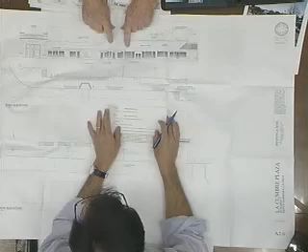We are going to be having hanging signs. I've got a detail of that if you'd like to see it. And then we addressed the rear of the building as well, which you see down below. I have pictures, which I'd like to show you, of the rear of the building.

That shows the coverage of the existing podocarpus trees that are in place. So what we're proposing is a fairly simple fix in case these die and are removed. Basically, we're going to extend a plaster wall and infill in between with cedar lattice as a screen, which brings it up to the same screening we have on the opposite side. We'd be plastering these pilasters all the way down, but leaving the slump block in between as it is, and perhaps planting vines down at the base of that.

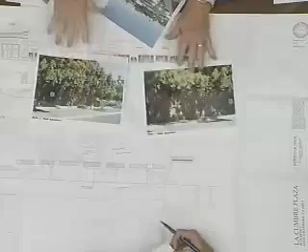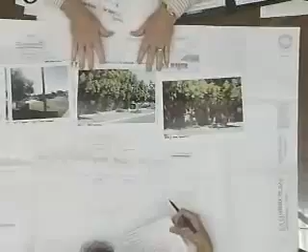Given the fact that this is screened the way it seems to be, this is a view from State Street at the backside. This is what you see from State Street, and it's pretty densely planted. We think that's a reasonable approach to the screening, and it effectively comes up to the top of the mechanical equipment beyond that.

So that's our suggestion for the rear elevation. We've made the adjustments in the front. We've also added planting areas in various locations, allowing for people to pass through and also allowing for more seating areas in places. We've added five in-grade planters in addition to whatever potted plants we put in there.

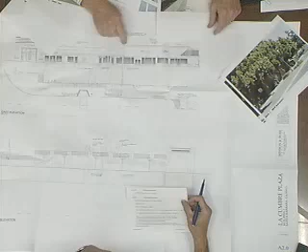Another issue was the extension of the parapet and how far that returns. Previously we showed an 8-foot return on that. We've increased that to 16 feet, and that shows up in the perspectives I'm about to show you.

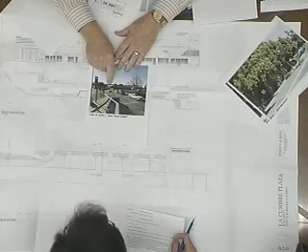The view from State Street of this building is this view right here, and this is taken from the top of a Google Earth truck, so it's about 10 feet high. You can see how much lower your point of view really is from a car. So the parapet beyond this is really not visible from that location.

I think as you get closer, you can see that that is the case, because the differential here is so little—there's just a couple foot differential. Then this is back from the edge of this, so you really won't see that at all.

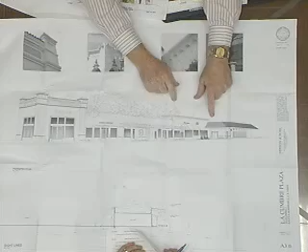Another comment that we're responding to—I'll skip to the next page, which is the perspective view, which illustrates the change to the storefront here, our proposal for the signage. As we understand, that's a separate submittal, but we wanted to at least have a concept for it, so the wood hanging signs hang off the trellis itself. One of the comments we received last time was that the corbel looked perhaps Asian.

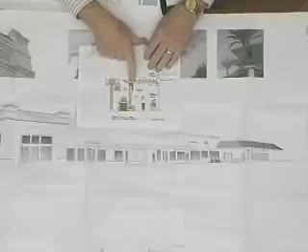We've adjusted that and revised how the lighting and the signage work in concert with it. We're still proposing wood posts and wood members. It looks similar to another project example that I have here. This is the lattice, by the way.

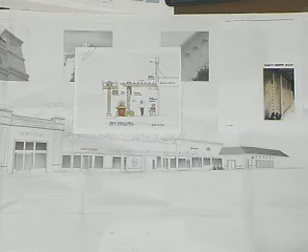We prepared these additional views as well in model form. The point with this: we are not asking for approval of this building. This is going to be separate and will be the responsibility of Panera Bread. But the rear elevation with the screening would look similar to that.

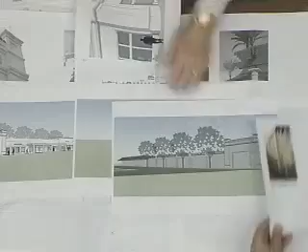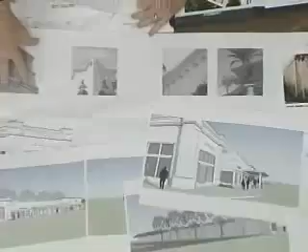Here's just a couple of other views from the model that we prepared. The components are not fully detailed, but we're looking at the cornice detailing following in spirit with what we did in this first building here. We are going to have extended corbels, as you see here with the first building, and then we're referencing this sort of form for these corbels down here. We don't intend to do it exactly that way, but that's the spirit of these designs.

And then finally, the example of the change we're proposing for the trellis is to revise the details, something like that, along with the signs changed as well—with wood posts rather than the precast that's shown there.

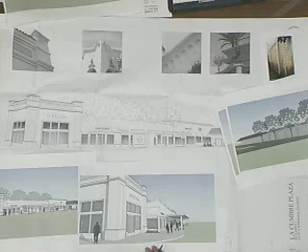Here's another picture of that particular building. We did another location, so I'm really referencing that piece of it there.

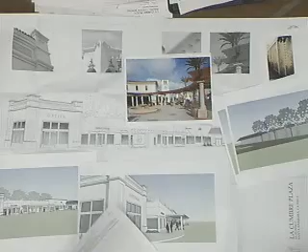In conclusion, I think we've responded to each of the comments we received, and given the fact that the back of the building is pretty well screened by the podocarpus, we've still acknowledged that it needs to stand alone, and I think we've got a reasonable response to that. We've demonstrated, with the perspective views and also the photographs, that you're not going to see the returns on the parapets other than what you see in the perspective here. This represents a 16-foot return. We will be refining the details with the next level, but in concept, I think it begins to work pretty well for us.

Do you have a roof plan, by the way? Yes, we do. It's in the set. Actually, that might be the piece we...

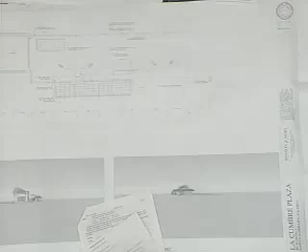We had been indicating that just as a dashed line above the plan previously, but I think you did ask for a roof plan, so... that's the return there. And these are actually the views in proportion of what you'd see from State Street, for instance, in that view, and this is in front of Vons.

Looks so little. With nothing around it. Yeah.

Okay, all right. With that, I'll see if there's... do we have any public comment? No? I'll bring that back to the board for questions then from the board.

Paul? Yeah, on the roof plan, is there, does that include?

Is this 16-foot wings that come back, is that on the north end as well? I'm not seeing that on a plan, on the roof plan. No, we're not returning it on the north end. And as I said, there's only a 2-foot differential. And if you can see from this view from State Street, if we returned it, you wouldn't see it anyway. So this is the view from State Street. In fact, that's an elevated view because cars are probably 6 feet below that point of view. And you can see what you do see.

Okay, that's my only question. That's it? No Keith? Dawn? Yeah, I had just a couple small ones. On the elevation, this elevation, what are these? This was the existing slumpstone wall. What are these lines and these little inset lines? And then what's that line there, that horizontal line?

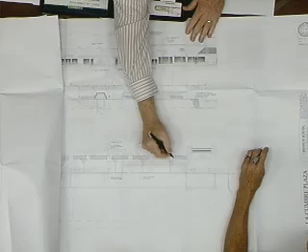See the other photo, it doesn't really represent a change in plane. This is set back from this. This plane will be in the same plane. You know, I don't know that we're going to need anything there, and it'll all be plastered, screed, so there won't be a real line. Not really. If anything, there might be something, because if we've got a frame wall above and it's attached to the block, it may crack at that point, so we may have a very thin screed or something like that, but nothing that's meant to be visible. So that's not really there.

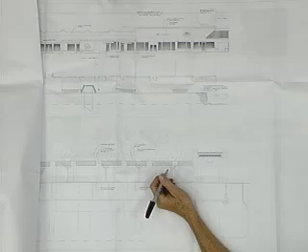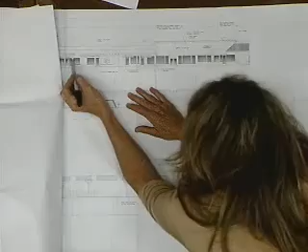And then my other question was, on the front elevation, on one of the renderings, you show the beams that come back to the building kind of sitting on a plaster trim, but here it looks like the trim is way below and not in line with any of the trellis members. So here you show the plaster, and then you show this kind of horizontal projection of trim. But then if you see that one rendering, it looks like it's making sense in terms of where the trellis dies into it, but not on the elevation drawing.

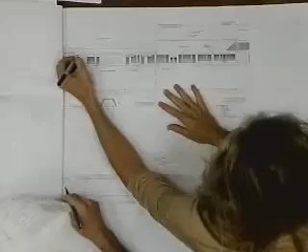The detail followed this drawing, and the detail is correct. It will be sitting on top of that piece of boarding. So this line right here is supposed to be the line of the top of the - exactly, but that doesn't follow any line of the trellis. Well, this line should sit right here, halfway down, in fact. So that line just needs to be drawn up a little higher, it needs to be moved up about 4 inches. Yeah, because these die into it. Yeah, that's what I thought. That's exactly right, no more questions. I think the detail is meant to clarify that. Okay, thanks. Paul?

Couple of quick questions. Are you aware of any construction that's happening on the back side of the building that we are proposing this trellis and such? I just turned it on, I'm sorry. I was there over the weekend on a totally unrelated thing, and this is the back side of the trellis.

Okay, I guess I'll show it to you first. There's a fire sprinkler pipe that's being installed, and I just want the board to be aware of that and how it impacts the construction of what you're proposing here.

Just so we're all on the same page, because we're doing a TI, the new fire code and building code require all buildings to be fire sprinklered. So that's what triggered this pipe being put across here. Because it was a TI, it didn't get design review, but now we're doing the front side, so we should address that. It's not to penalize you at this point, it's just to make the board aware, but other people can see the way that precision block was going up like he was talking about.

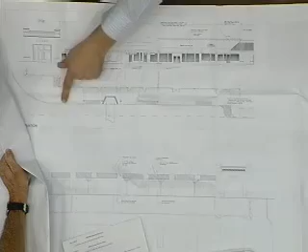There, the bus stop's right here. It's right before the corner, right before it starts curving around. It's right up in here. And that's where the bench is, right here. The bench is right here, and then the bus stop is right there, just where this cuts back.

Trey, did you want to comment on the sprinkler line? Well, you're exactly right, because of the TI, the fire department required the whole building to be sprinklered. That's the reason for that. Sorry about that.

Okay, Chris? Thank you, Mr. Chair. On the west elevation, you're showing vines on the exposed CMU walls. It looks to me, from the photo, like they are not existing, so you're proposing vines?

Actually, we need to clarify the ownership there. The property line is very close to the wall at that location. There is already planting there and already irrigation, but it may be on the neighbor's property, or we would like to add vines. I see, okay. I didn't see any planters or vine pockets called out on the plan, that's why I was asking. So if you do end up heading down that road, you might show the location of those planters.

The next question was the crosswalk. I assume it's shown at the location where it currently exists. That's correct. Okay, that's it for questions. Thanks.

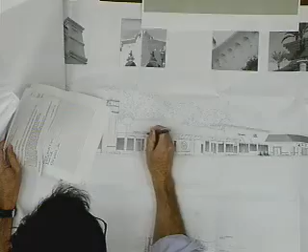Okay, all right. You had another, I think it was a 3D perspective of this corner here. So what we'll have here is a beam, or a plaster rib, that goes down like that, right? Exactly, the detail that you see here.

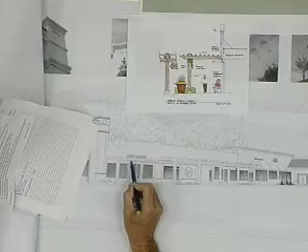And this connection here already exists, that connection. Yes. So the parts being added are these columns here outside, with this bulb out that comes above it, right? These will be added. No, those actually already exist, part of the storefront here. So the only thing added is this bump, this thing here, in that location.

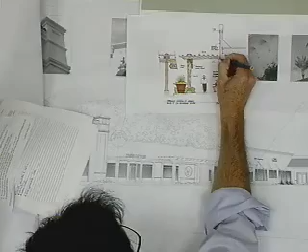Yes, and that divides along the existing storefront. It goes all the way along. That's the part that's being added, this part here. But this goes right down and turns like that, right? And returns like that. Right. Okay.

And then, I guess my last question is, what is to be done about the fire sprinkler line that's there now? Well, I wasn't really aware of it, so I've got to figure that one out. It's going to have to be... encased somehow, but they have to get to it as well, so that might be somewhat problematic, but we'll come up with a solution at the next level of detail.

Okay, because we'd like to know what's going to happen with that as part of this, looking at the whole back to front of these buildings. That's one of the items we need to look at, especially since that's probably a violation right now, to be able to do it without a permit on the outside of the building like that.

So, okay, that's it for questions. I bring this back to the board for comments. Paul? Thank you, Mr. Chair.

I like the addition of the in-grade planters, and how you've broken up the building, the two sections of the buildings, works a lot better for me. I would like to see some return on the north end. I might be the only one on this, but I still think you can see it. I still think it looks like a fake wall right in front. I don't think you have to go back 16 feet, but I still think there should be a return.

If you go back to the section right here, and if you look at your roof plan, the one I was looking at, these units are all the ones that run down the building, and this is the only one down here. Is that correct? That is correct, and there's actually a screen around that.

Yeah, so I don't see why you need it at all. If you can't see it, you don't have to screen it. If it's not seen from view, you don't have to screen it. So we request screens on equipment that's visible. If you can prove it's not visible, it doesn't require a screen. So you may find that you don't even need it, except for screening this unit, and then, in my opinion, you could do that with lattice, just if it's not already there.

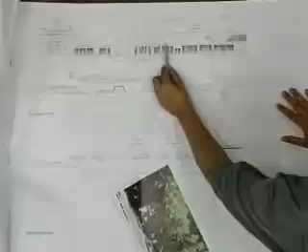Awning-wise, can we go to the main elevation? This is a minor point, but I'm just looking at the way these awnings are laid out, and it just looks a little funky. All I'll say is the awnings need to get addressed, but a solution would be to have just one awning over See's Candy that relates to the door, move the lettering over so that this reads as an elevation, and drop these two sides. Then over here, I'll let you be creative and come up with something, but right now the spacing of the awnings and the mullions and everything just looks a little bit awkward, and I'll leave it at that.

And then the last point is to make sure that all of the bus information is shown, because I see a lot of pedestrians there, and it just needs to be incorporated with your landscape plan. But other than that, I like the direction it's going.

Thanks, Paul. Chris? Thank you. I agree with Paul's comments. I think...

We were discussing the awning issue, and I think centering that over the doorway would really help, and maybe stretch it out a little bit too - it doesn't have to be so thin. As far as the lattice goes, I'm worried also about the longevity of the material, so for that, I won't go into it - I think my other colleagues here have commented enough on that one. I do appreciate the addition of the planters here, I think that's going to really help.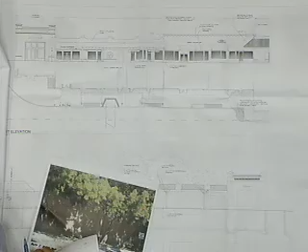It's such a stark area to begin with, so this is much appreciated. I'm looking at this—1, 2, 3, all the same size and equidistant. For some reason I want to stretch this one out a little bit and make it longer. I think it's a real safety issue. Instead of being able to walk out anywhere from any of these stores, you concentrate the flow into certain areas. But that's just a minor suggestion—throw that off a little bit and not make it so symmetrical. But that's all I have. Other than that, I think it looks good.

Okay, thanks, Chris.

I agree that this corner here needs to return, probably at least so that you can get maybe 2 of these things, because that shape on the end is going to be very odd to do if it's just the thickness of the wall continuing around the corner. If you flip this around the corner and the wall is only half of that arc, it just looks really odd. So you need to really turn this around so you can get at least 2 of these, or one full one that makes a corner. I would suggest that you get 2 of these before you end it. Something like that. Yeah, right.

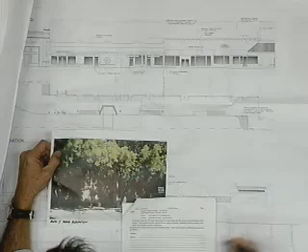The other thing is, it's unfortunate, but I think you have to address the fire sprinklers on the lattice work—I agree. I just do not think the wood is appropriate up there, and I would like to see a metal or some other material that would be more in keeping with the architectural integrity of the building. So I would be more for you changing the material of that.

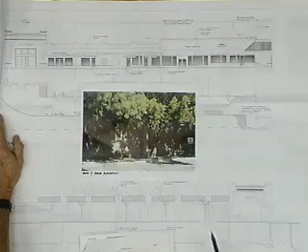With that, I had a question. No one really mentioned it, but you talked about plastering these columns and making them a different color. You're thinking these would be white? I was thinking they'd be white. My question to you is whether that's something we'd want to see at this point—I'm kind of asking the board that. Right now it has a very monolithic color across, because these actually have a fairly deep shadow line and a groove in it, so they have some distinction already. I'm wondering if these things were white, it just wouldn't look more odd than it is now. It's just a thought that came to me, whether we'd want to keep it all one color. I'm not sure. I think probably both could work, but it's just something that came up, and I think that's something we'll have to flesh out by the time we get to the end of the process.

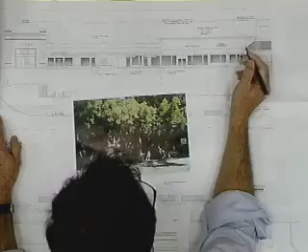I agree with Paul a little bit on these awnings here. I'm not sure how easy it is to do that, but I noticed this bay looks to be the same bay as this one, so if this entry were right there, and then that bay—you're getting some symmetry in this one, and then maybe there's another one over here that's about the same size, or just an odd size. It just seems odd that this thing splits right there like that. So I'd prefer to see that you could look at that a little bit more closely.

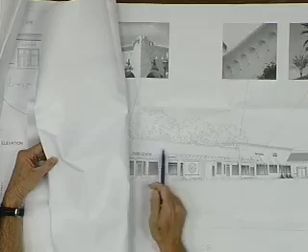It's even across here. And then in one of your elevations you show this rib here, but in that other elevation, back here, we don't see it. Is there a reason for that? It's intended to be there. Oh, okay. So yeah, it is there—we submitted this, we actually caught a few of the things you've mentioned, added the molding there. We actually respaced these somewhat too, because this looked odd to us as well. Oh, so you've actually kind of gone in that direction already. Somewhat. Okay, yeah, that would be good when you come back.

And then my last thought—is there something better that can be done here with this planter, with this point that's coming there? I'd like to see if you could. I don't know what it could be, but it just seems a little odd to me that it just comes to that point like that.

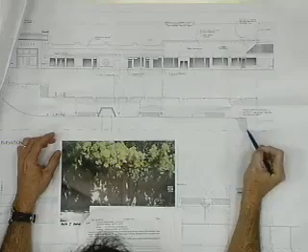If I look at this planter here from just the way it's done, it really looks like it's not planned from the original, like it's an afterthought from what was left over, and that's how we got that space. These corners never really work anyway, because you can't grow anything in them, and you can't irrigate them, so we'll have to figure something out.

If you could look at that, okay, other than that, I think the direction you've taken seems to be working, and I think we're okay for a motion.

Mr. Chair, I'll make a motion for project design approval with the comments to eliminate or provide a solution for the exposed fire sprinklers.

Resolve the awning breakup locations. Return the north parapet if visible. And the fourth comment, either remove the roof screening on the west elevation if not required, or provide an alternative solution with different materiality.

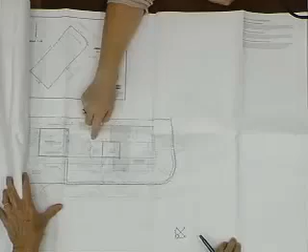Thank you, Mr. Chair. My name is Bree Medley, representing the owner, Jennifer Checchio. The project is located at 101 North Salinas. Currently there is very little parking associated with this property—we have one covered space, and that's about it. So there's a need for some covered parking. What we're doing is proposing a two-car garage with an accessory dwelling unit above, both of which are 540 square feet. Beyond that, we'll be rebuilding the existing carport, which is right here, but it will not be used as a carport—it will just be rebuilt as a deck for the house.

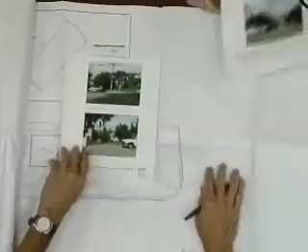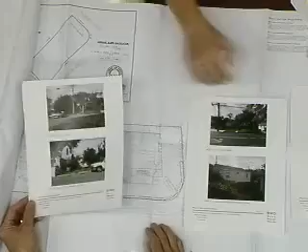It's located on the corner of Mason and Salinas, so it's got two front yard setbacks as a result. This is the view from Mason Street, and then the view right down the southwest property line—you can see the existing neighbor's house. This is the area we're proposing for the garage and accessory dwelling unit, running down this property line right through here. This is the front of the building. Due to the sloping of the lot, it's a single story on the side from Salinas Street, then drops down to about 1 3/4 stories going down Mason. This is the rear, where we've got the existing carport, approximately 10 by 10, not really acting as a true covered parking spot. And then an additional view from Mason Street.

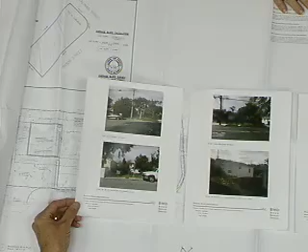I'm confused too, and I don't know why. So this view right here is looking this way, that's correct, and the land drops down this way. Okay, this view right here is looking over here, on this side—so the land is dropping down that way. That's correct, and you're also seeing the fence on this property line going down. This is the view looking towards the existing house and the existing carport. Okay, got it. This view, and backwards, is actually looking this way.

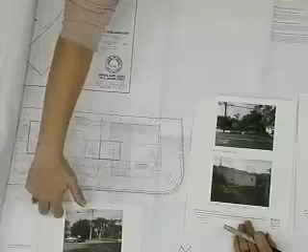And then when you're looking at these, also same view—this is looking right here at the existing house, and this view is looking right at the area we're proposing to put the garage. So it's looking directly right here. This is a proposed garage? Yes, that's what this is here. This area right there—oh, you put the garage right here? Yes, that's correct. And the yellow is the neighboring house.

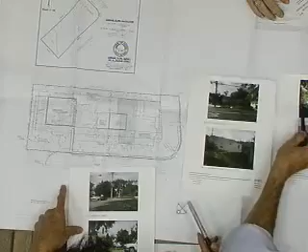So cars come down here right now? Correct. They come down this driveway? No, you're looking at this side - the driveway comes off of Mason Street. It's really small, comes down here. I see, you go through these blue gates? No, it's a secondary driveway that exists that goes to nothing.

This seems to be right in front of, do you see those steps going up there? Oh yeah, I'm sorry, I was looking at the other one. I was looking at this driveway right here. Yes, that looks correct - it looks like there's a gate right here. That is correct. We're going to be removing that driveway.

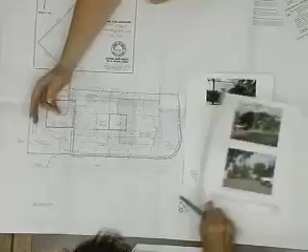And you're putting a driveway where? We're just extending this existing driveway. So there's two driveways that exist in the space currently? The other one here? Yes. That's the one you're extending? Yes, that's correct.

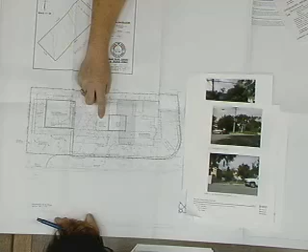You're building a new garage, and you said another dwelling unit? Yes, a 540 square foot accessory residential unit. And then you're building something here? This is the carport that's there existing - we would just rebuild it as a deck for the house itself.

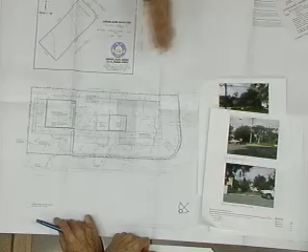We're in the R2 zone, right? Yes. But you haven't gotten any comments back yet from staff? We've had a number of conversations associated with it, and we're hoping to be going forward with the zoning review of that.

Could you explain the modifications while we're in the site plan? So the modifications are, first, a reduction of parking. It requires 2 covered and 2 uncovered for the additional residential unit. I've spoken with transportation about that, and they can support that modification specifically due to the size of this dwelling unit and the size of the existing house itself - they feel the density is appropriate.

The second modification is where there's a basement area that has a 7'6" ceiling height. We'd like to lower the basement by 18 inches to make that habitable space so they can have a family room downstairs. A portion of that existing basement is in the front yard setback, so that's another modification we're requesting - to work within the front yard setback.

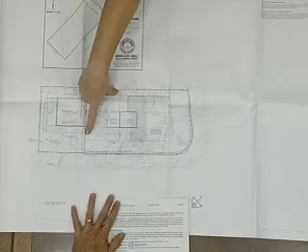And then the third is the reduction of the open yard space. Due to the fact that we have 2 front yard setbacks, we're minimized by the amount we can gain. We currently are providing 1,100 square feet of common open space instead of the required 1,250 - that's the third modification we're requesting. If we only had 1 front yard, we could have 1,400 square feet.

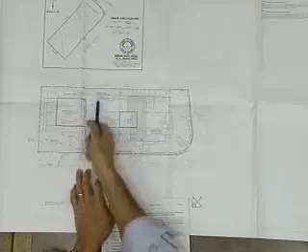So you're short, is it 100 square feet? 150 square feet short. That's correct. Not including your deck? Not including the deck. But you are going to be rebuilding the deck? Yes. Okay, then go ahead with the presentation.

So the first portion is the basement. What we're requesting is to drop the basement floor 18 inches to make this a habitable space. The upstairs area is quite contained, a little small, so we have 2 exterior stairs currently from the yard below. We're requesting to remove one of the stairs, keep the secondary stair, and enclose the exterior sunroom patio in order to get stairs to go downstairs, making this one cohesive unit for the basement and first floor level.

The downstairs portion would include a bathroom, a family room area, and a little office. That's about it.

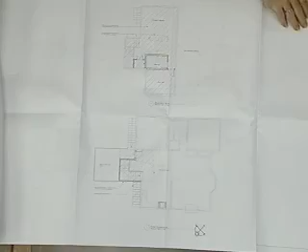So what we would do is pretty much maintain what is there, except enclose it with some additional plaster walls, because right now there's a railing that goes around, and then add windows so it still maintains an open feeling in that area without making it feel more dense or massive. We'd be removing the stair that is currently right here and maintaining the existing stair. No changes to the front elevation off of Salina Street - all of this is mainly existing. We would just be doing a little work in the upper area, an open sunroom, making it more of an enclosed sunroom.

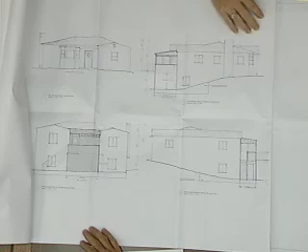And then the two-car garage downstairs, and then a single residential unit that would have one bedroom, 540 square feet, small kitchenette area, pitched roof to match the existing house.

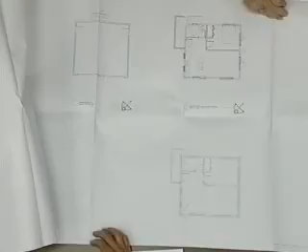For the exterior elevations, we would have a rear stair so that we were minimizing impact to the neighbors, because the neighbors on the rear side, that's actually a parking area. Materials to match the existing house, and a trellis off of the Mason side over the garage door to break up that elevation a little bit.

Plaster to match the existing house. Wood windows. Okay, that's it? Yep, that's it.

Okay, and then this driveway comes from high and it goes down. Is that it? No, it's actually pretty much at the same level. It's because where it slopes, this area is kind of a flat pad as it stands. It slopes down towards this pad itself, but the driveway itself would stay pretty much a flat area.

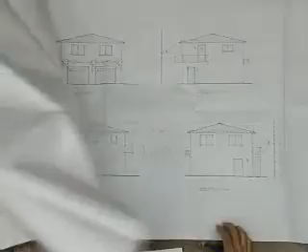From the street? So then this portion is now taller than the other existing house. No. Am I understanding? The site slopes from Salinas down. Oh, so does the street? Yes, it does. Okay, so Mason slopes as well.

So this is a pretty flat area. Okay, I get it. This slopes down, so I get this. It's actually about 6 feet lower than this house. Okay, so it is actually lower. Okay, great, thank you.

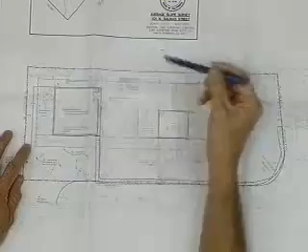I think it's not showing an easement right now. Well, there's another property on the other side. Right, is the easement on their property? No, perhaps I used the wrong word. Setback. I didn't know what the setback would be, from the property line to the building. Yeah, 13 feet. It's 13 feet from the property line to the face of the building, but the building envelope setback is 5 feet away from the fence. So you're allowed to build up to 5 feet away from the fence? It's actually 6 feet for the setback itself, but we're providing parking that is uncovered there, which we encroach to the 3 foot, so 13 feet. Also, this is an encroachment into the side yard, the rear yard setback, or side yard setback?

For flat work, the paving, yes, that is correct. Parking is allowed within this. Okay, there's no encroachment or no mod for any structure in.

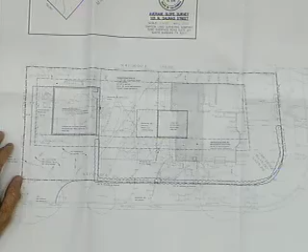I got the impression that presently at the principal house, that there's parking behind the principal house. I've never seen a car parked there. There's a gate, but that's my only comment on that. I think we're very interested in this property, and we look forward to your inspection of it, and as we learn more about it. Okay, and I thank you.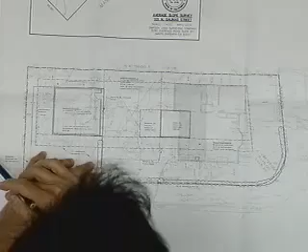Well, kind of, first of all, just to finish up with what Bill started, what is the setback on the side, on our side, right here? 8 feet 6 inches. Does that include the stairway? The stairs are within that 8 feet 6 inches. So it's about 5 feet 6 inches away? The edge of the stair is about 5 feet 6 inches away from the fence. So it's not 8 feet, actually, it's 5 feet? About 5 feet 6 inches. For the structure of the stairs, which will be, it's not going to be a fully enclosed stair, it will just be a sort of open stair feel. The building itself is 8'6", so the wall portion is 8 feet 6, the stair is 5 foot 6.

Okay, I have a hard time remembering all these numbers. Okay, my main question is, I don't know how this new building is lining up with our second apartment. And I want to make sure that the design, the windows, and the stairway, top of the stairway, aren't going to be in line with windows on the apartment.

You can review the plans. She can't answer. You're just here to speak right now. Oh, okay. And then you can talk to her later about that, or review the plans, and she'll show you. For me to review plans, I don't see things, so. But we'll be asking those questions too, because we'll be looking for the privacy issues. So we'll ask for the documentation, and then you can review the drawings, and she should have the documentation that will show that on the drawings. Okay, at least in the next presentation, she should have that. Okay, I'll give you my card after.

I think our other concerns are not this issue, not at this hearing, but water drainage issues, where do they enter into? Where does it drain to? Where does their property drain to? Does that discussion come in? Does it come in a later review? You say this is a design review, so.

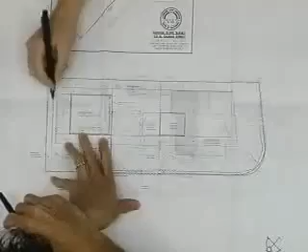Before we bring it back to the board, this is a 5-foot setback line that you've drawn here—that's correct, and that's the setback on that side. Then you have this dark line extending inside of the 5, but then you have 6 here. What are those two lines? I apologize, that's an error—that's supposed to be a 6-foot setback, so this line's supposed to turn here. So you have a 5-foot side yard setback and a 6-foot side yard setback?

I thought it was 6 on both sides, but it might be, and just because the existing building is there, that might be existing non-conforming within that 1 foot. Based on what zoning told me, but I will double check. Otherwise you might need a mod for the step, and what we would do is minimize this by 6 inches so it stays within. As long as the garage is 20 by 20, we have that issue too, and right now we're a little over that.

Thanks, I'll bring it back to the board for questions. Gary? One question I had—the existing driveway, is the apron existing to the back rear end of the property? Yes. Is that an apron for 2 properties, or just one? Just one.

And the ficus tree, what was your reason for removing it? It's not a very nice tree. They'd like to create a really nice garden in this area—right now it's kind of a hodgepodge of stuff out there. They may relocate it, but it's not a great specimen, it's a small tree. Okay, those are the only questions I have right now.

Thanks, Gary. Keith? Thank you, Mr. Chair. On your statistics, you're indicating this is a flood zone, is that correct? Yes. Okay, have you talked to building about the basement habitable space? Yes. Enough said, thank you.

Thanks, Keith. Dawn? I guess we'll look at the privacy issue that was brought up by one of the neighbors that I wanted everybody to look at. And even if nobody's parking in this area currently, you're proposing a 2-car garage and an uncovered parking space that's going to be accessible from Mason Street. That is correct. No questions.

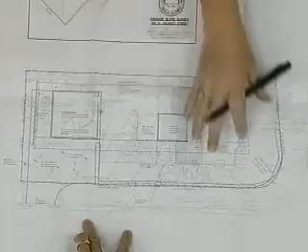In order to have the secondary or accessory dwelling unit, the requirements for that space are, for the residential unit, 2 covered and 2 uncovered. Currently, we have what's on record with the city as 1 covered space for this project. So what we would be proposing is 2 covered and 1 uncovered. So we would be missing 1 uncovered parking spot. Oh, okay, so we're creating 2 additional spots that aren't there to help with street parking issues and making sure that people can park there.

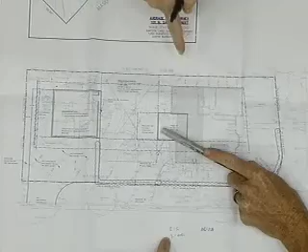I also wanted to clarify, this isn't going to be a duplex. You said you're creating 2 more. Yeah. Wouldn't you be 1 less? No, because they only have 1 covered right now for this house. They're proposing another covered and another uncovered, and they're moving this covered over there.

So currently on site, there's 1 parking spot. Right, we're proposing 3. Right, but your requirement is 4. Is 4, yes, that's what I'm getting at. So you're 1 under what your requirement is. That is correct. That's the base of what I got again. Yes, thank you. That's correct. Okay.

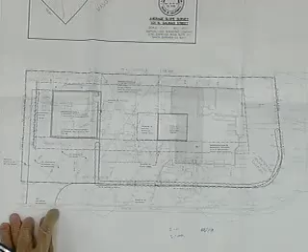Okay, so this is the extent of the existing driveway? Yes. So this is what you're keeping, adding that hardscape here? That is correct. And then this still remains, or are you taking that out and gating that in? We're going to fence that and remove all of the driveway that goes in there and make this all green open space.

And this is meant to be a new hedge? Yes, that's correct, going all the way around.

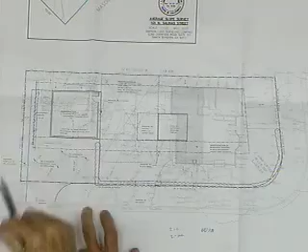Okay, and so where is the pathway that goes from this building to that building? We haven't quite put that in there. I haven't done any landscaping at this point because I wanted to get some feedback before we go forward with full landscaping and full drawings, since we're asking for modifications and we've been talking with planning for a number of months. I'm sure we have stairs that go up in this direction, so I'm assuming we would have some nice walkway through that area. And people that park here, where would their natural path be to get to the house, since this parking is moving over here?

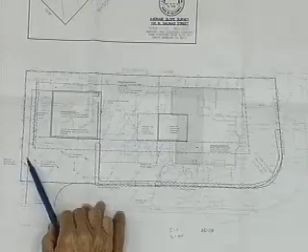Well, you can walk across either the driveway or back through here. So they go around the stair that's here to get to here? That's correct. So the owners of this property walk around here, or here, or right through here.

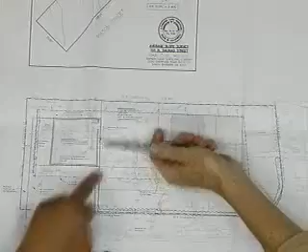So I think the stair needs to be somewhere else that's facing the street - yeah, somewhere in here. And I realize that potentially aggravates your open space situation, but I think you need to get creative and figure it out, since you do have more room here setback-wise - that needs to be studied. So architecturally, I think what you're doing here is fine. I think the planning of this needs to be rethought so that you do address the street.

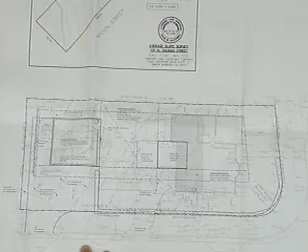And then the drawings do need to show the adjacent buildings and where their openings are, so we can address the neighbors' concerns about potential privacy conflicts. So, big picture, I think the program seems reasonable. I think there's some planning issues on the orientation of the second unit that needs to be rethought.

Thank you. Thanks, Keith. Dawn? I agree with Keith, that's it. Thanks, Dawn. And Gary. Paul? I think this project's moving in the right direction.

A couple of comments, one having to do with the stairs and moving it to the other side. The building that you have right now is 23 feet wide - it really only needs to be 20 feet 8 inches, so you can make that building narrower and have your stairs wrap on that side, which makes your open yard smaller. But you explain to the staff hearing officer that's a direction ABR is going, because it enhances the livability of that unit - that's very important for us.

The existing curb cut width - it'd be good to know the one that you're losing and the one that you're saving. If the one that you're saving is extra wide, you could narrow that up. The one that you are getting rid of is a bonus, because now there's a possibility of shoehorning another car there as surface parking. So that's something you should boldly show on your plans - that you're getting rid of that, and there's a possibility of reducing it, or just show us that width.

This is for later - I didn't quite understand the enclosed sunroom and saving the deck and rebuilding the deck, because when I look at the elevations, it didn't look like the whole deck was being shown. It looked like only about 4 feet. So when you come back, the drawing should show the entire extent of deck to remain, and the posts that come down, and make sure they don't look too leggy if you're rebuilding it. And it also probably, however you're going to rebuild it.

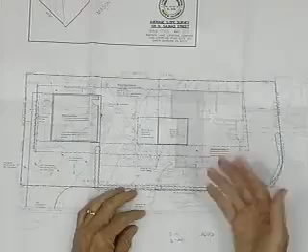Thanks, Chris. I agree with everyone, really. Mass, bulk, and scale is fine. I think you have to look at how this is organized with the stairs, that sort of thing. As Paul said, we don't want to go too far talking about the modifications until you go further. Personally, I have no problem with you trying to get additional living space that's in the footprint that's going down. I think that's what a lot of people should be doing, and if they could do that, it has no aesthetic impact. It doesn't increase the mass, bulk, and scale of the building. I'd just say make sure you could do that with the flood control. So that's not an issue for me.

I think what we'd like to see you addressing before you come back, when we want to tackle the actual architecture of the building, is some more neighborhood photos other than the ones you have of your building. The buildings that are here and across the street, we'd like to see what those are. On your site plan, we'd like to see where the neighboring structures are, and if you can show photographs of those buildings so we could see where the windows are and how they'd match up with yours, that would be important. When you come back, clearly have your setback line figured out and clearly delineated. That's really about it, just a little more clarity on your site plan, and then we'll be able to address the actual details of the architecture. But mass, bulk, and scale is fine.

And I'm open for a motion, and I see Keith taking notes. Mr. Chair, I'll take a stab at it. Thanks, Keith. I'll ask the applicant, would you prefer an indefinite continuance or two weeks? I think we'll probably have to do an indefinite because we're going to have to talk with staff further about the modifications and the ZIR hearing. So this will be an indefinite continuance back to full board, with the following comments.